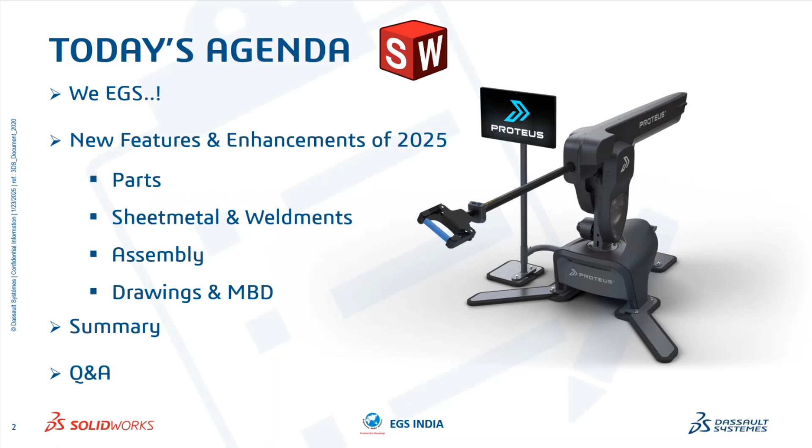We will be going over a short introduction about us, EGS, and then we will go over the new features and enhancements of SolidWorks 2025, followed by the enhancements in parts, sheet metal and weldment interfaces, then assembly and drawings, and finally we will summarize it all.

So let's start. EGS is a certified SolidWorks reseller. We have been providing design and FEA solutions for the past 3 decades, in the market since 1993.

We have implemented PDM and PLM software solutions for many of our customers. We have offices in Chennai, Coimbatore and Trichy, with Chennai as our headquarters, and we are one of the leading SolidWorks solution providers in Chennai.

We have 140 plus employees with 1,500 customers. We have affiliations with CII India, IMTMA, IPI, MMA, etc. We have consistent growth of rupees 42 crores every annum. These are our teams.

We have a separate team for reselling software solutions, and we have our own development team. We are partnering with Dassault Systemes for reselling of SolidWorks in the southern region of India.

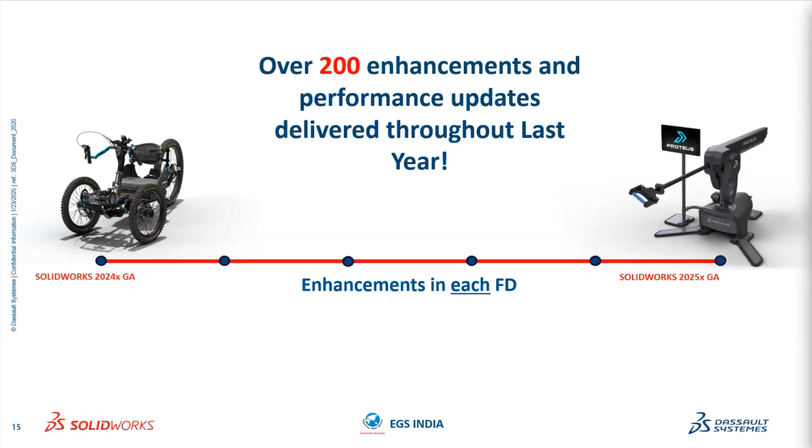This year there are a few enhancements and new features in SolidWorks 3D CAD. We will see about that. Over 200 enhancements and performance updates have been delivered throughout the last year. There are new features added to SolidWorks 2025. I will explain these in the upcoming session.

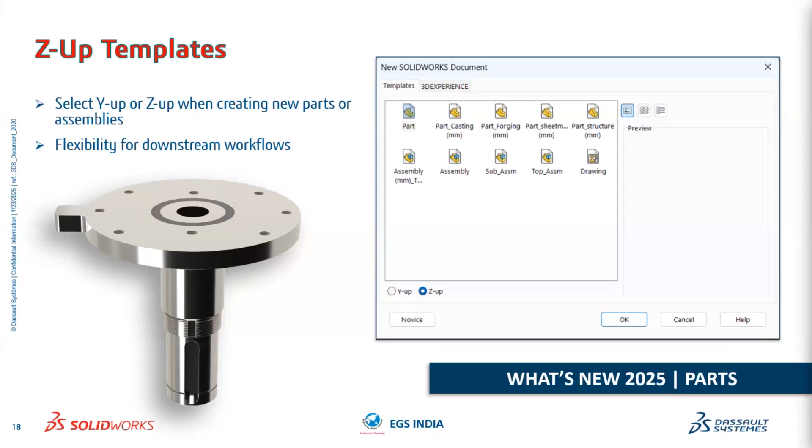Let's start with parts. The first feature we are going to see is a new orientation, which is Z-up orientation. We all know we have had the Y-up orientation in SolidWorks for so many years. In order to get Z-up orientation before, we had to change the orientation manually and set it as a template. Now that additional step is no longer required, as we can simply use Z-up orientation on our newly created parts, assemblies and drawings.

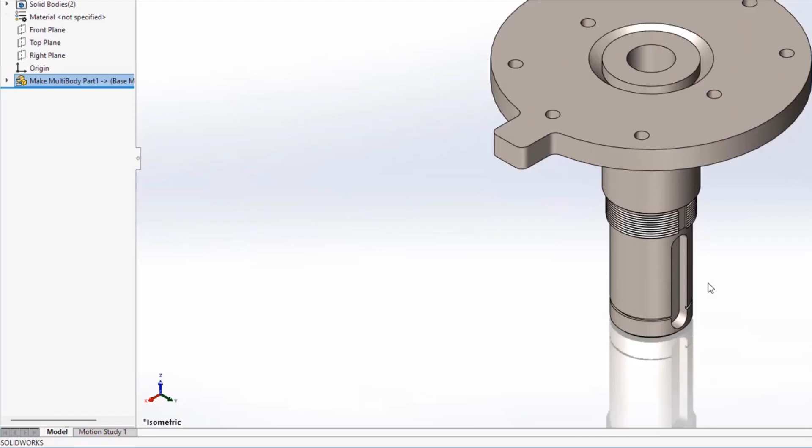Also on our existing parts and assemblies, we can simply switch the orientation for our use cases. This will be very much helpful in our downstream workflows. So this is our first enhancement.

The second enhancement came in the form of the Silhouette Defeature. Users who have used SolidWorks may know about the Defeature operation we have in SolidWorks. We have two options in that: one is to simplify the existing geometry, and the second one is to create a Silhouette Defeature. This Silhouette Defeature has had some improvements over the past year.

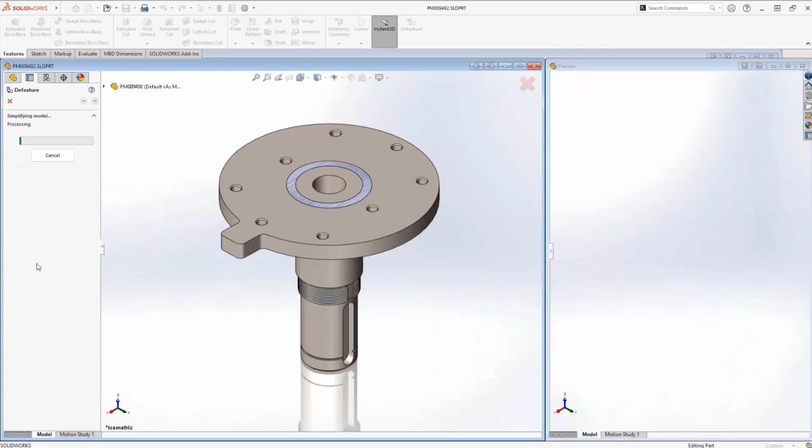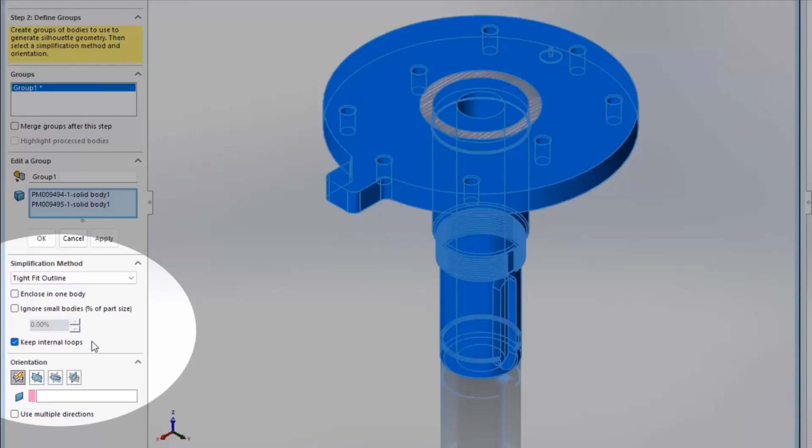We can choose our geometry and create a silhouette based on different bounding boxes, like bounding box, cylindrical bounding box, normal bounding box, etc. We can also create silhouettes based on a tight fit outline. This will be very useful in retaining performance with maximum efficiency while using SolidWorks. With a few simple steps, we can create silhouettes, or defeature any complex component into a simple component for our assembly use cases.

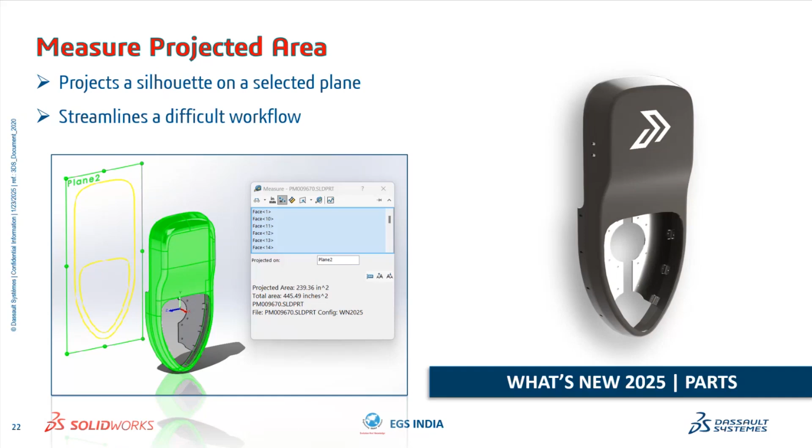The next enhancement is in the Evaluate tab. In the measure tool, we can now measure the silhouetted area. All we have to do is select the part's complex faces and project those faces onto a determined plane. We can use the existing planes to calculate the overall projected area of that particular part. This will be very useful when we are trying to get the developed area of that particular part. So as we see here, we can easily measure the projected area using the Evaluate tool.

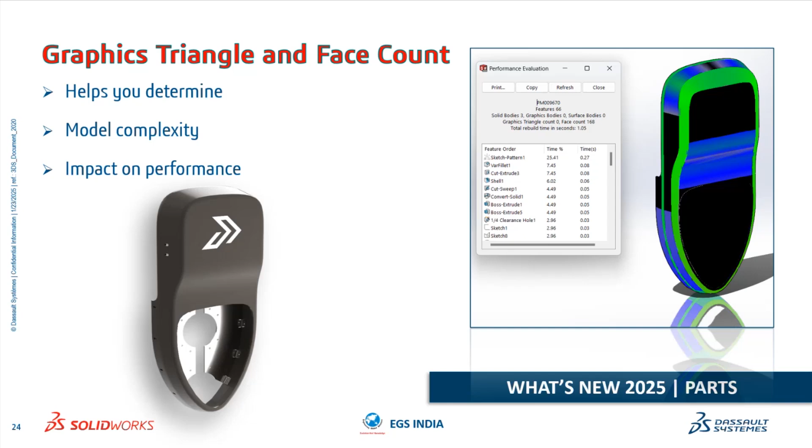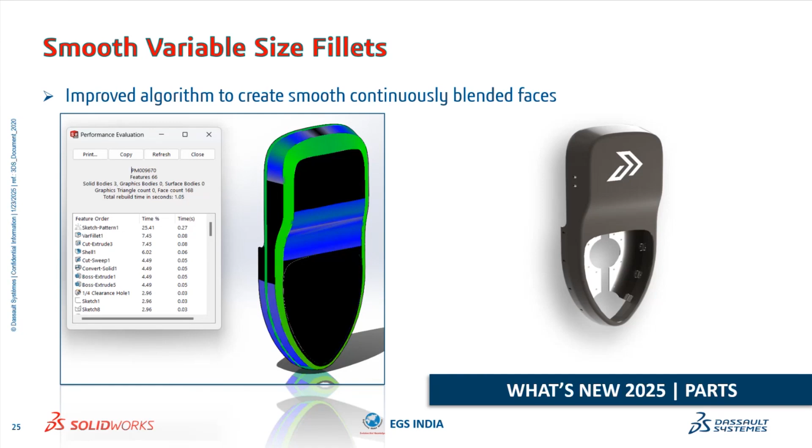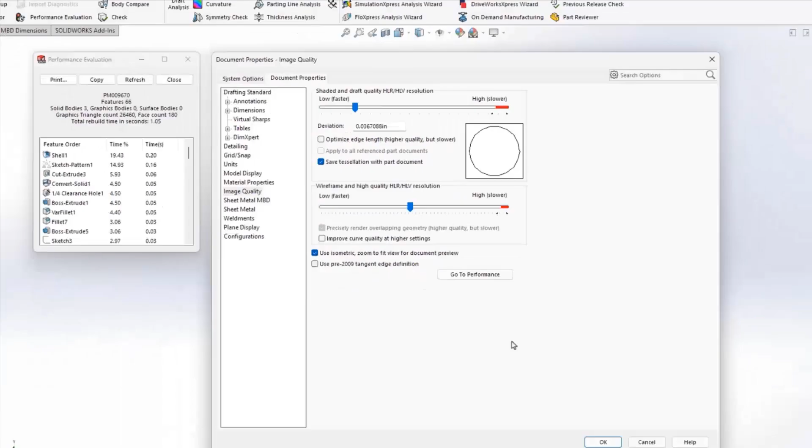The next enhancement comes in the form of graphical triangle and face count. We can determine the model complexity and its impact on assembly performance. We can also optimize performance by obtaining smooth and variable size fillets across our parts. As we see in the evaluate tab, we can determine the face count and graphical triangle count of the part, and reduce that to gain more efficiency in SolidWorks. As we do this, we can see live that the graphical count and triangle count have changed, which has a major impact on performance.

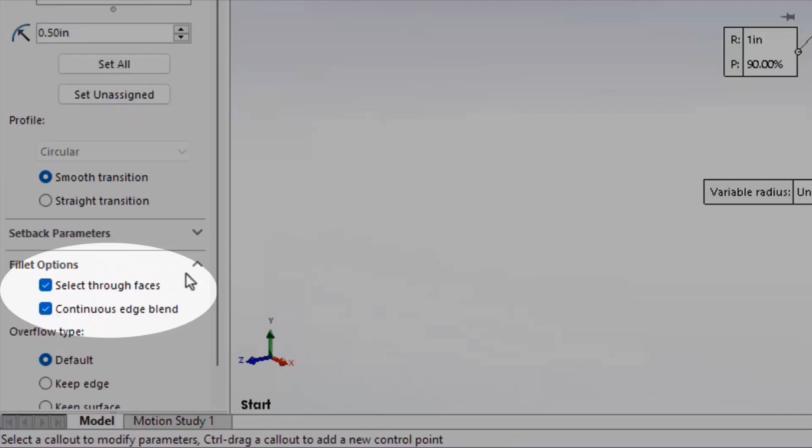We can further fine-tune it by creating smooth variable size fillets. We have an extra option to create smooth and variable size fillets, and we can check the smoothness of the particular part. As you see, the graphical triangle count has been drastically reduced here.

The next feature included is auto repair sketch relations and dimensions. Here we have a feature useful on assemblies where we can repair the mates. Similarly, if we have any dangling or wrong dimensions, we can simply repair that particular dimension.

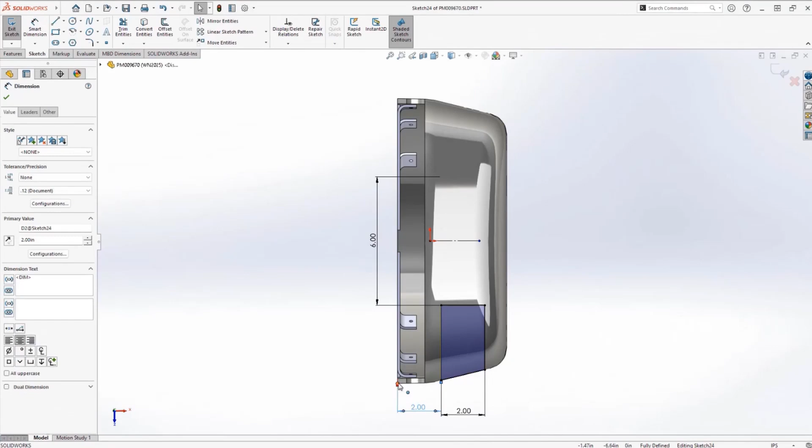All we have to do is simply select the sketch and select that entity. We can see what's wrong in that dialog box and track down the exact defected area. We can simply transfer that entity to a different place or repair it along the way. We have the option to repair the dimensions, or we can use the display and delete relation tab to replace all repaired, missing, or dangling dimensions.

Other features include converting your mesh body to standard BREP, and we can also import 3MF beam lattice as parasolid lattice, graphics mesh, and wireframe lattice. These can also be converted into mesh geometry.

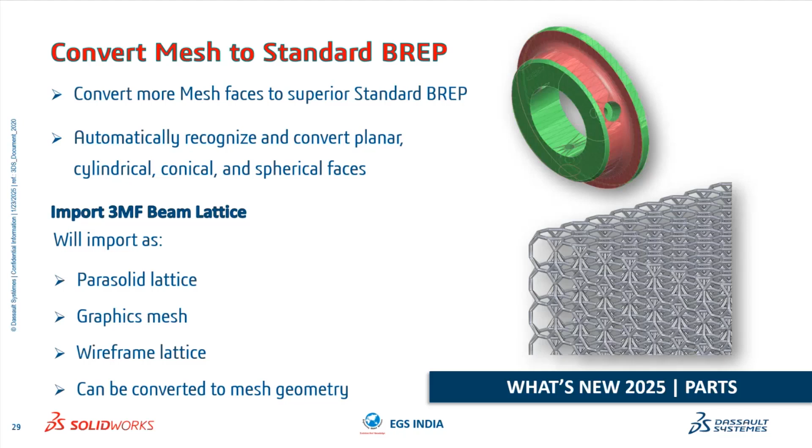We can now also pattern the reference geometry. Previously we could only pattern existing features or sketches, but now we can pattern the reference geometry, maximizing your workflow.

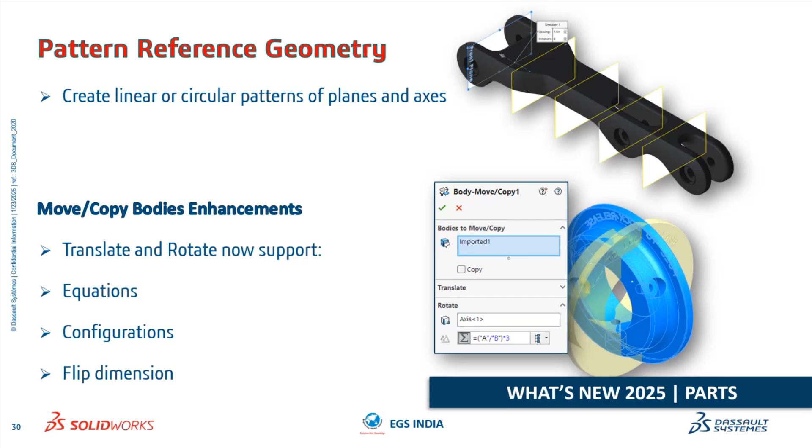There are enhancements to the move and copy body feature. We can translate and rotate as we all know, but now that feature supports equations and configurations. You can use your own equations and configurations with the move and copy body feature.

We can also use curve through XYZ points, creating multiple curves based on the XYZ locations we enter. We can simply reload it by clicking the reload button. You can also convert your existing entities into construction entities.

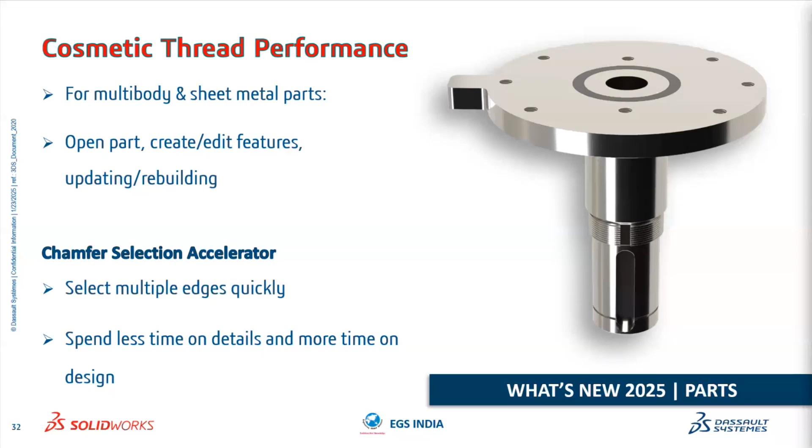The cosmetic thread performance of SolidWorks 2025 has also improved compared to SolidWorks 2024. As we know, we have the fillet selection accelerator, which we got in SolidWorks 2024. Now we have the chamfer selection accelerator, which helps you select multiple edges very quickly, so you spend less time detailing the component and more time on the actual design. These are a few important enhancements in the part area.

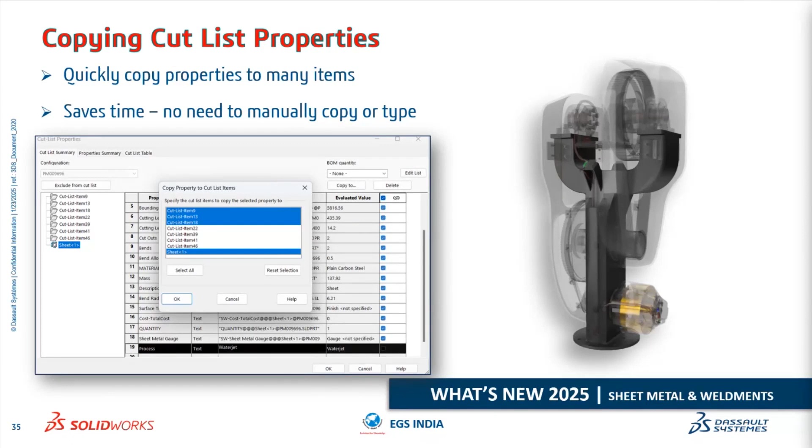Now let's go to the sheet metal and weldment interfaces. We can copy the existing cut list, which will majorly save your time. If you have existing properties in your cut list, you can easily copy them and use them on multiple cut list items.

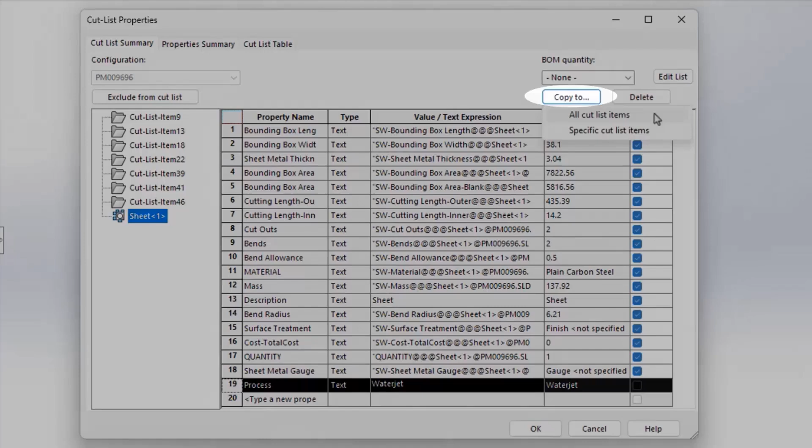As we see here, we can copy the existing properties, or create new properties and copy them within a few clicks. We can simply copy to all other cut list items, or select which cut list items to copy this particular property to. This will be very useful when creating sheet metal or weldment components, helping you save modeling time.

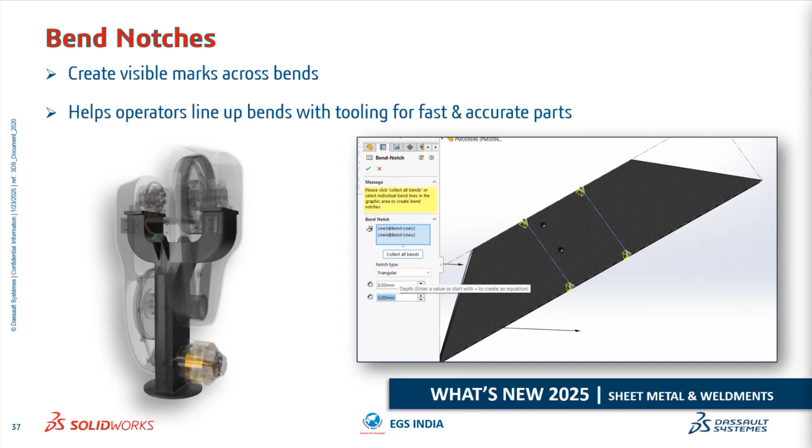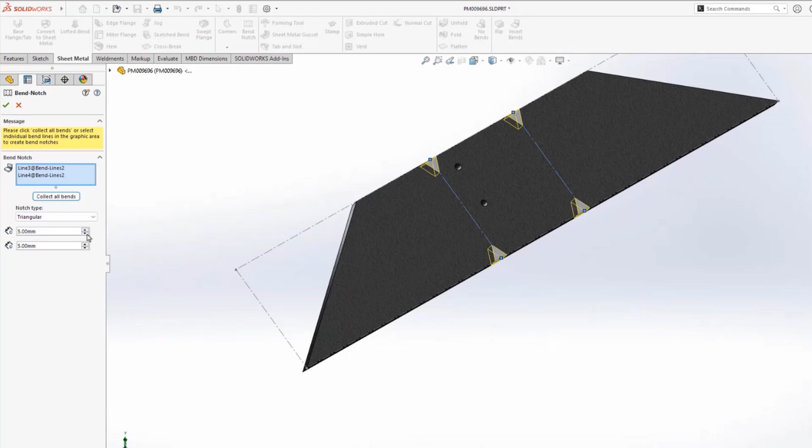We also have a new feature added to the SolidWorks 2025 sheet metal environment: bend notches. This provides better visual representation by creating visible marks across the bend, helping operators view bends easily. We can flatten the existing sheet metal part, and based on the bending lines, create bend notches with measurements. We can choose the type of bend notches and create them at different measurements for better visual representation.

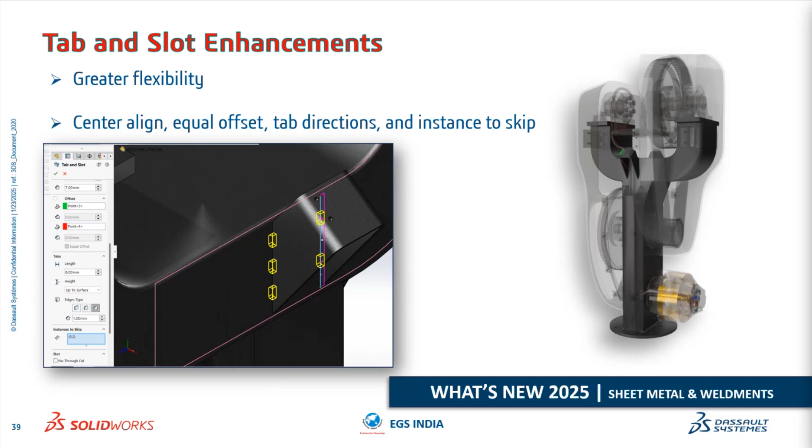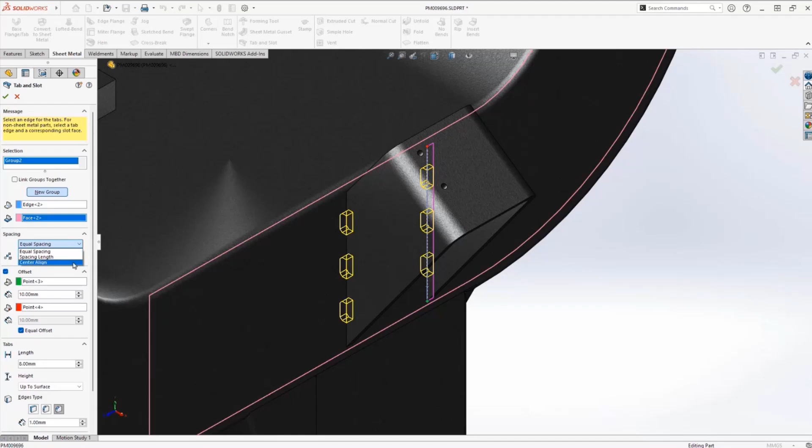In SolidWorks 2024, we got tab and slot as a new feature, and now it has come with a few enhancements. With greater flexibility, you can control each side of the tabs and slots, creating two different groups for the right hand side and left hand side for better separation. These two groups can be modified as per our needs. Here I'm simply skipping the instance on one side so we have a better differentiation between the right side and left side of the component. This is helpful for the visual properties of the part and provides better visual capabilities.

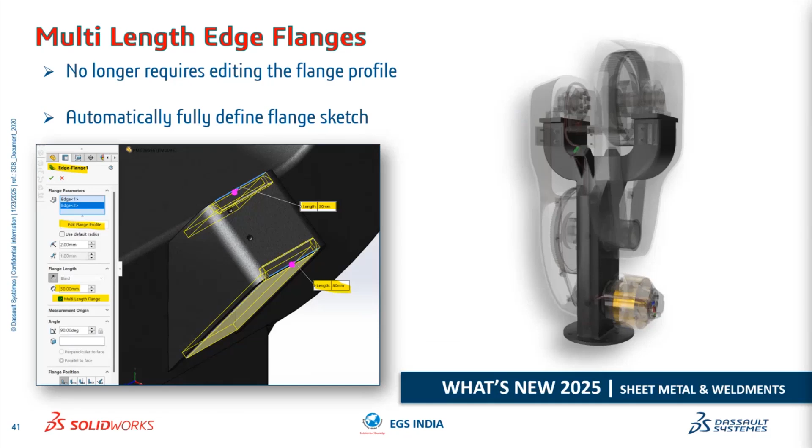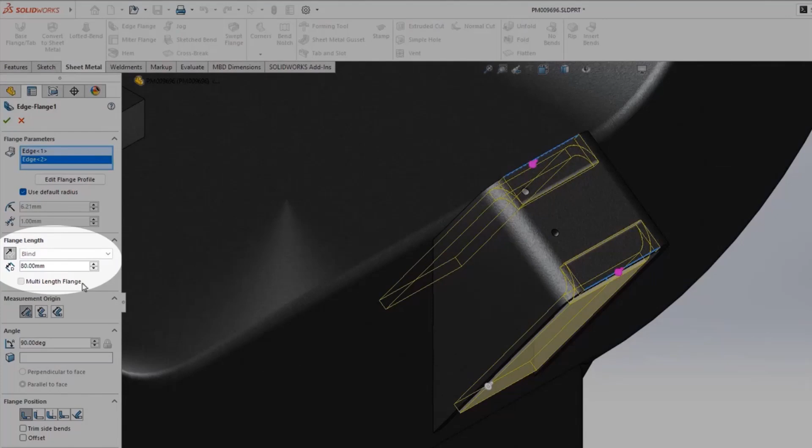Another addition to the sheet metal environment is that you can now create multi-length edge flanges. Before, in previous versions, we had to select each particular edge and edit it separately for every edge. That step has been avoided here, as we can now create multiple length edge flanges in one single feature. You can simply differentiate the two edges and determine the length of each separately, which helps speed up your workflow.

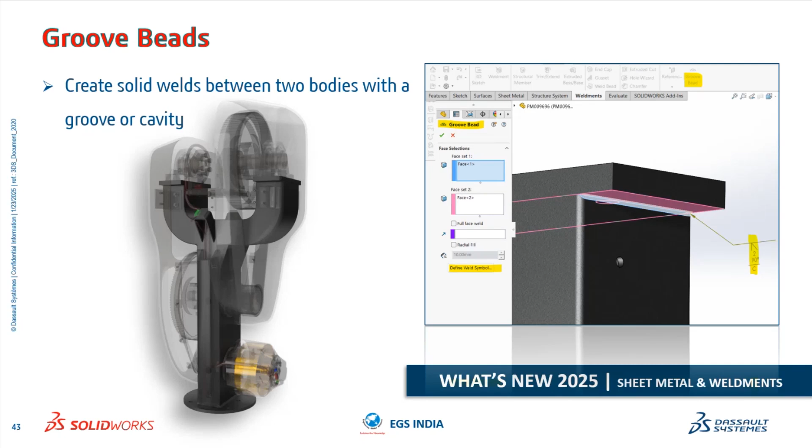Groove beads: as we know, we already have a feature called fillet bead that is useful for showcasing welded joints visually. In order to showcase the welded joint between components, the groove bead feature is now available in SolidWorks 2025. All we have to do is select the instances in that separate feature, selecting two different face sets, and simply use the groove bead feature, which also lets us include the weld symbol. The weld symbol now supports the ISO 21000 series, which I'll get to later.

We also have enhancements on weldment sides, such as allowing protrusion on complex profiles. There are other minor structure system improvements, such as being able to pattern or mirror a structure system. Connection elements can also behave as trim members in SolidWorks 2025.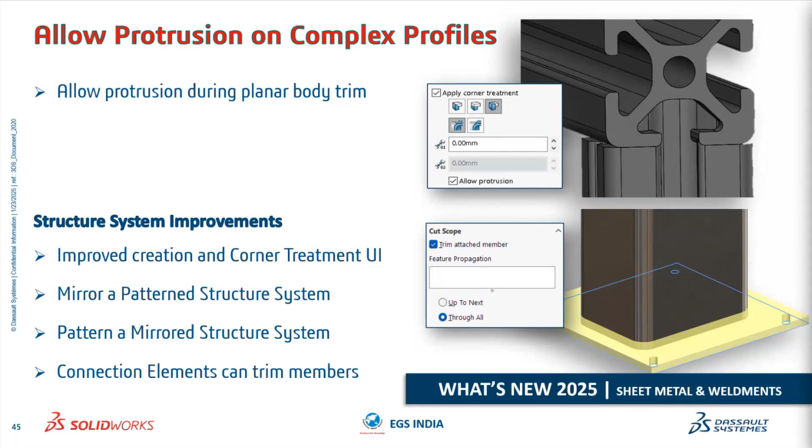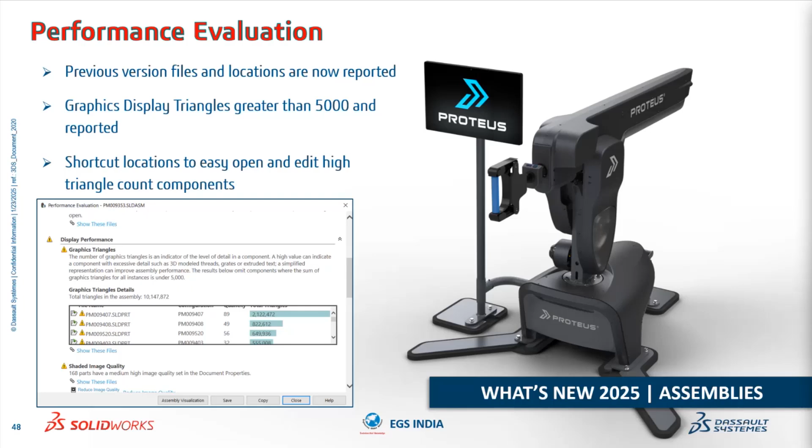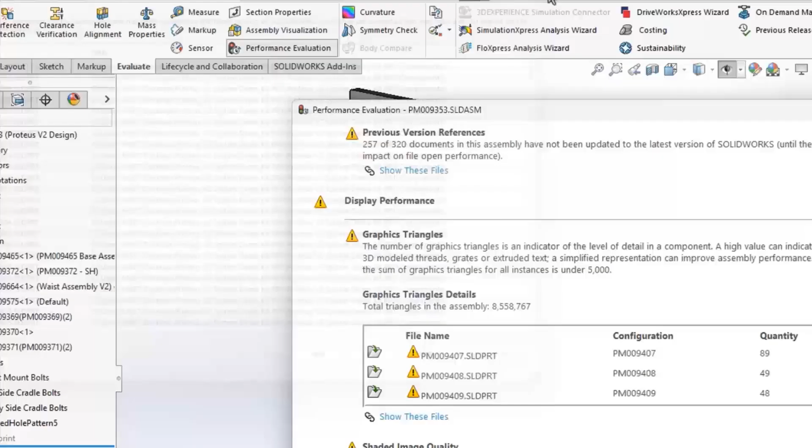Let's move to assemblies. There are a few enhancements here, the first being in performance evaluation. If you use a large assembly with more than 500 or 1000 plus components, this tool comes in handy to determine which component or part consumes more performance or takes more time to load. We can see the amount of graphics triangles, which component has the highest graphic triangle count, and which component took the maximum time to load inside the assembly. We can open that particular component here itself and further simplify it for better performance of the assembly, directly from the performance evaluation tab.

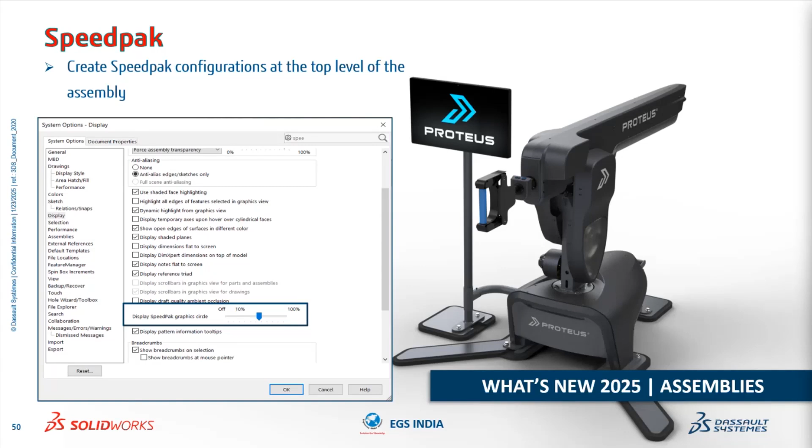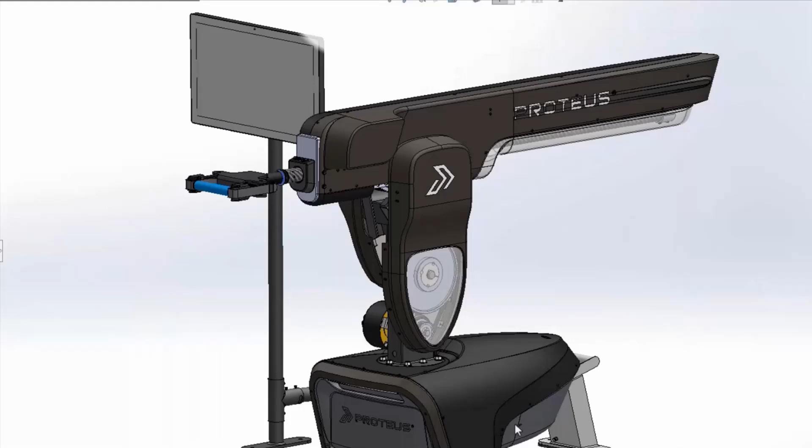The next enhancement is in the SpeedPak feature. SpeedPak is used to improve the performance of large assemblies by retaining essential components alone, while the remaining components only retain their visual properties in the SolidWorks assembly window. We can increase or decrease the intensity of the SpeedPak's graphics circle. Here we already have a separate SpeedPak configuration; as we edit the SpeedPak, we can see the important components we've chosen. This graphics circle can now be controlled from your system options, allowing us to reduce or increase its intensity in order to obtain better performance in large assemblies.

So the next enhancement has come to the LDR. Large design review is a very useful feature for people who use large assemblies. If you want to open a large assembly within an instant, you can use large design review to instantly open it in order to showcase that assembly to your higher officials or your customers. This will be very useful in that particular scenario.

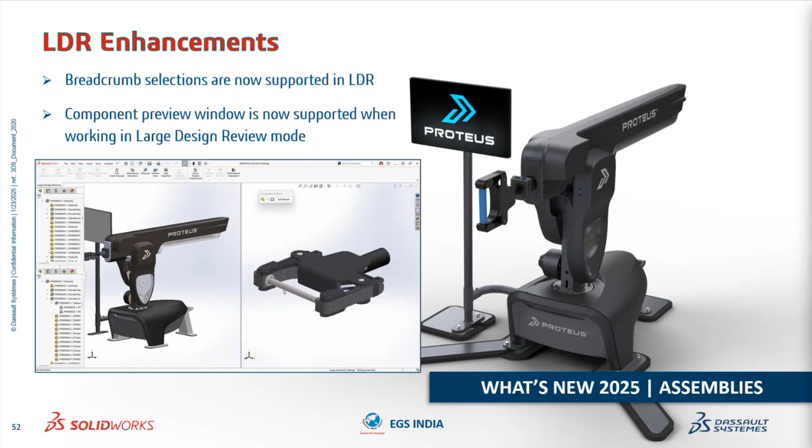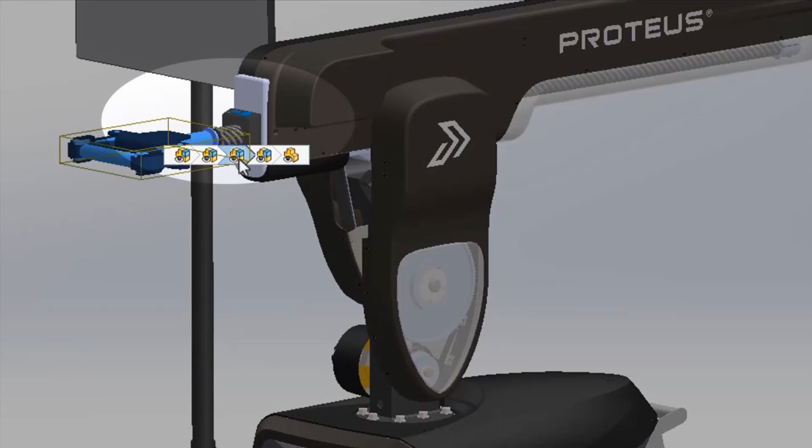So LDR has now come with enhancements. You can perform certain operations, such as checking the interference between components in LDR mode itself. You don't have to go back to resolved mode, you don't have to change the particular part into resolved mode. All you have to do is simply check the interference between components in large design review mode itself. So this will be very useful in your workflow in tight situations.

So the next new feature that has been added to assembly is the display state table. We all know how configurations are useful in the SolidWorks part and assembly environment. The display state table is a new addition to that. We can create different display states using this display state table.

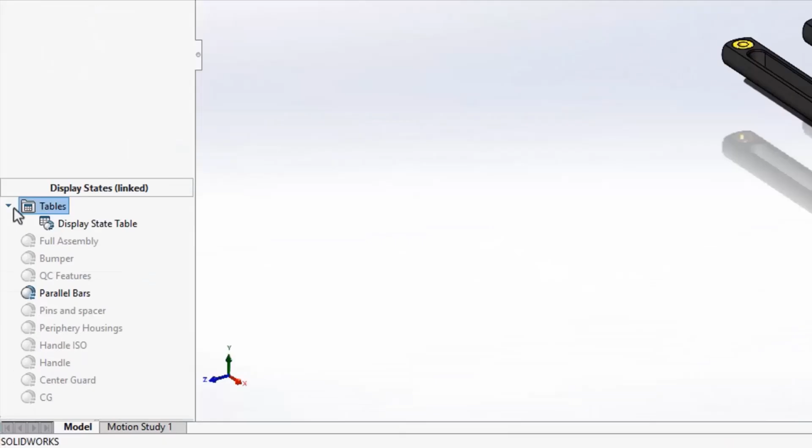If your assembly has different display configurations, so if you want to show a few particular parts or a sub-assembly for a particular drawing sheet, you can separate that based on your display state. As we see here, I've separated the entire assembly into different display states with the display state table. You can simply hide or show whatever component you want based on the display state, and you can create multiple display states all at once.

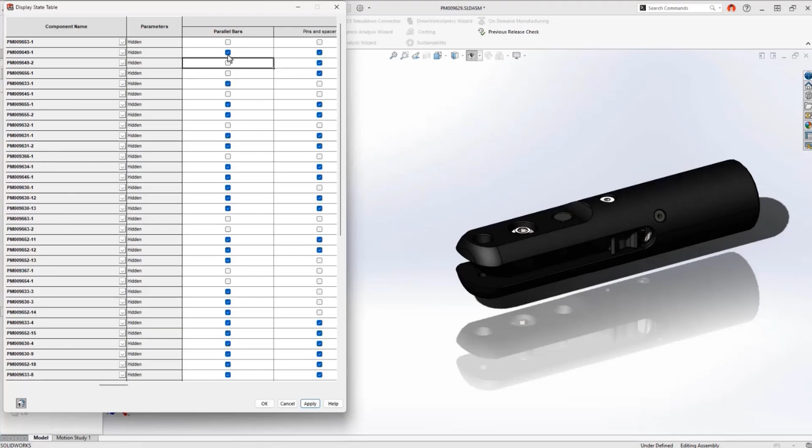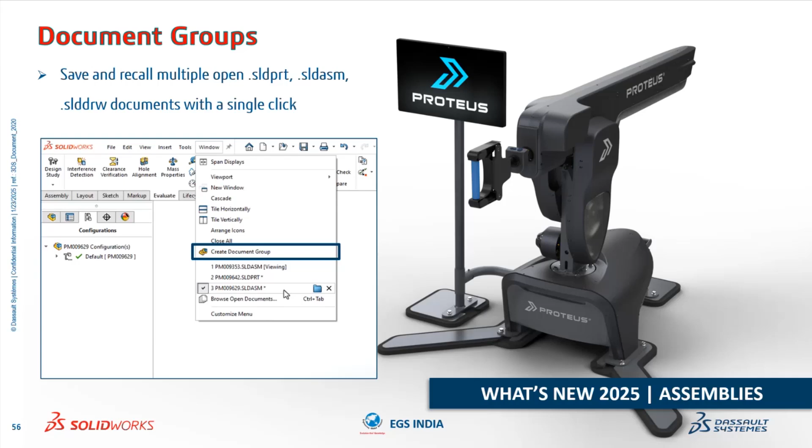So now we can group the documents while using SolidWorks. This is applicable for all the part, assembly and drawing environments. So if you are working on a particular drawing and you need to jump between the drawings, assembly or a part very frequently, we can use this document grouping to open all that assembly and part in a single click, and we can switch between them seamlessly. So this will be very useful when you work under urgency.

So you can simply create multiple groups of those components. As you see here, I have the assembly and two sub-assemblies open simultaneously. We can switch between those CAD documents.

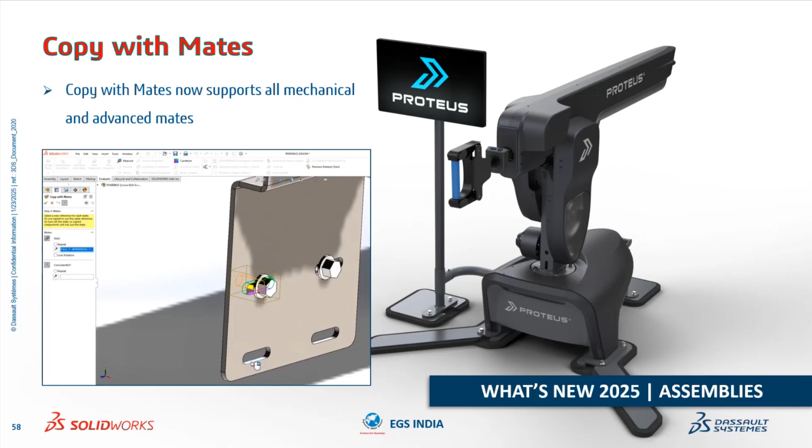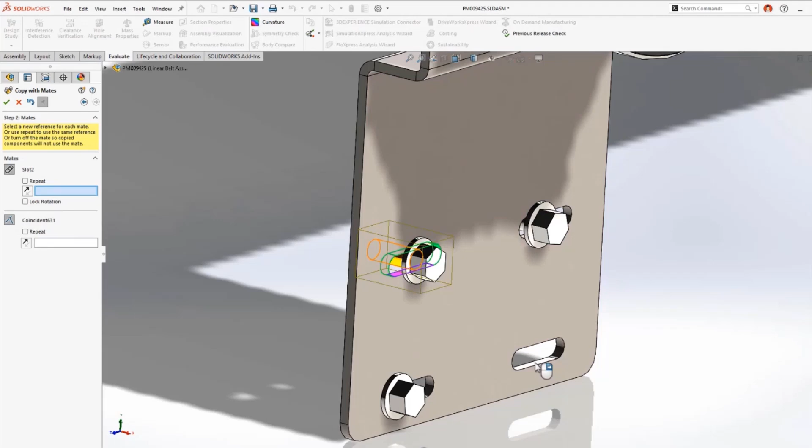So copy with mates is a well-known feature that has been used by a lot of users. Copy with mates has come with enhancements. Now it supports all the advanced mates in SolidWorks. The existing copy with mates in previous versions only supported the standard mates, such as coincident, perpendicular, mates like that. Now we can use copy with mates on advanced mates also. Like here, we can use copy with mates to create slot mates on that particular bolt. So this is a very useful feature included in SolidWorks 2025.

So the other enhancements are, we can include the 3DEXPERIENCE connected attributes in our assembly visualization tab. The assembly visualization tab, for those who are not aware, is a very useful tool to determine which component takes more time or more space to load, and which component has more mass, so we can simplify; we can see through that.

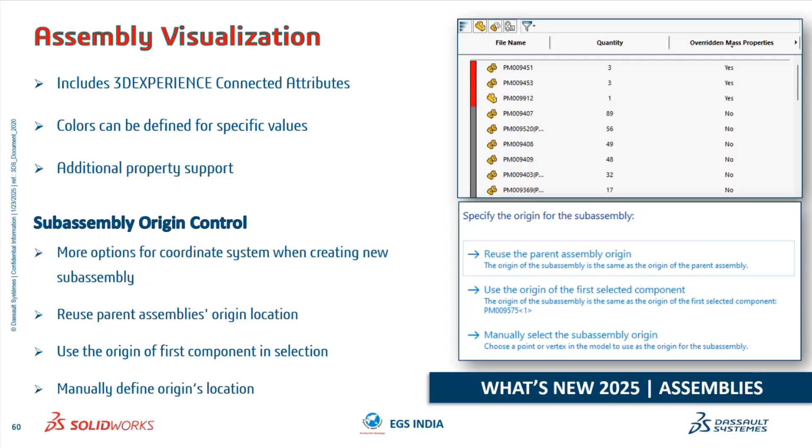We also have a subassembly origin control, where we can reuse the existing parent assembly origin, or use the origin of the initially selected component or initially imported assembly, or we can manually select the origin of the subassembly separately. The reorganize components property manager UI is completely revamped. As you can see, the selections have been made easy.

The assembly mass property performance has also been improved, so that the mass calculations won't happen every time for each and every part, as every part has its own mass calculations. Those mass calculations can be obtained from the assembly itself in order to reduce the time. You can also measure the angular rotations between coordinate systems if you have multiple coordinate systems, and you can seed the pattern display state. So you can use the display state as a pattern seed.

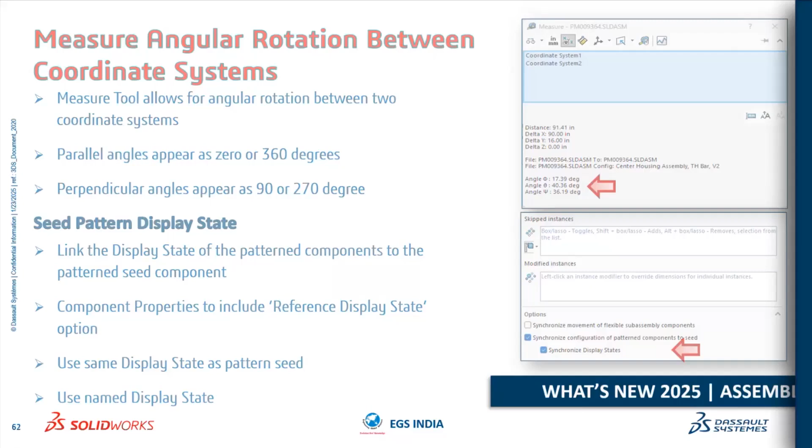Let's move to drawings.

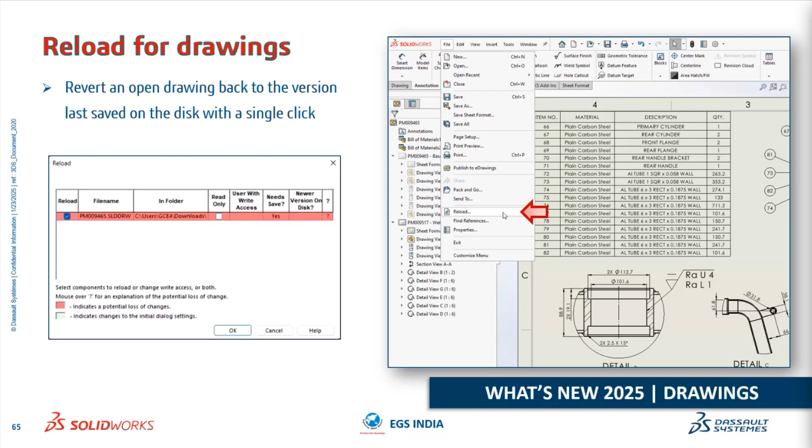So the new enhancement or the new feature that has been added to drawings is you can reload the previous version of the drawing if you haven't already saved your document. If you made multiple changes, or changes which are not required to your drawings, you can simply reload to the previous version of the drawings if the drawing is not saved before.

So as you see here, we have the option on your file tab. So you can simply reload to the existing saved version of that particular drawing. So this is a very useful feature in order to avoid unwanted changes or unintentional changes in your drawings.

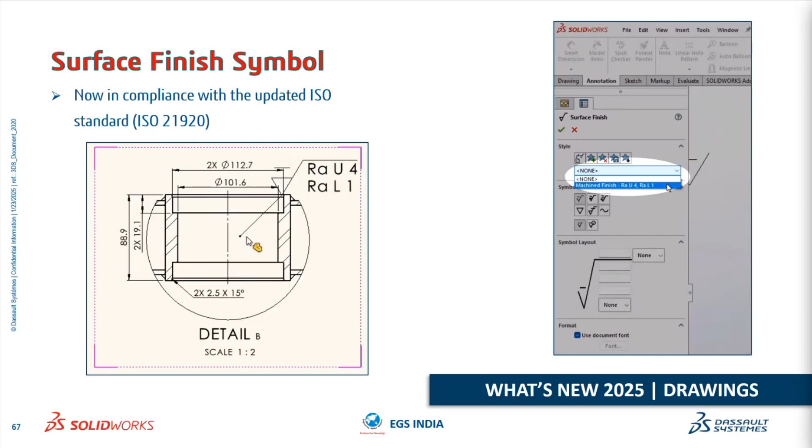So the surface finish symbol is now in compliance with ISO 21920 standards. So we can use that while using the surface finish symbol. As you see here, we have a drop down to choose between the standards. So we can simply choose and use it on our drawings.

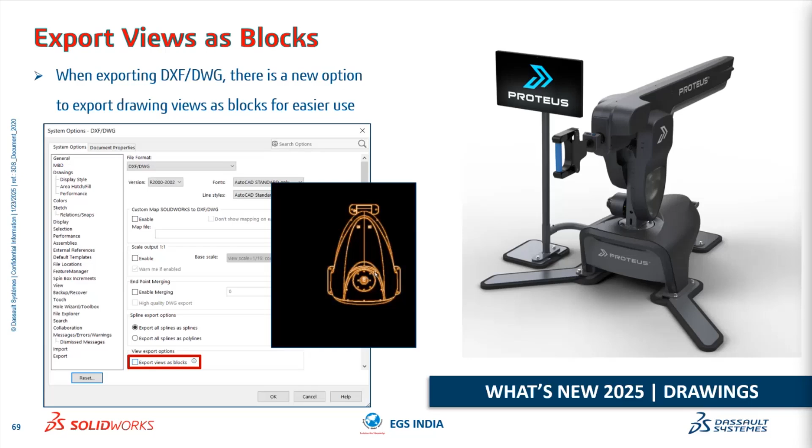So now the views can be exported as blocks for a better communication between 2D CAD and 3D CAD. So you can simply save your drawing to DWG or DXF format. While saving, you have the option to save each and every view as a block separately for a better interaction with the 2D CAD.

So before, if you wanted to do this particular operation, you had to go through multiple steps. So now that series of operations is simplified into one single step. So you can simply create multiple blocks of your existing drawing very easily.

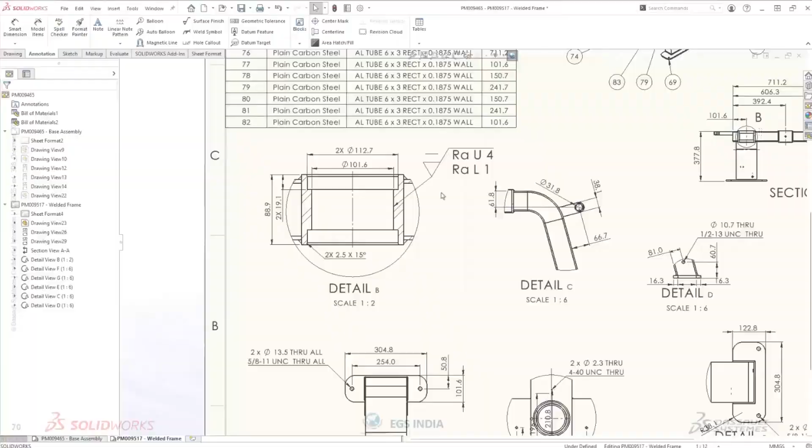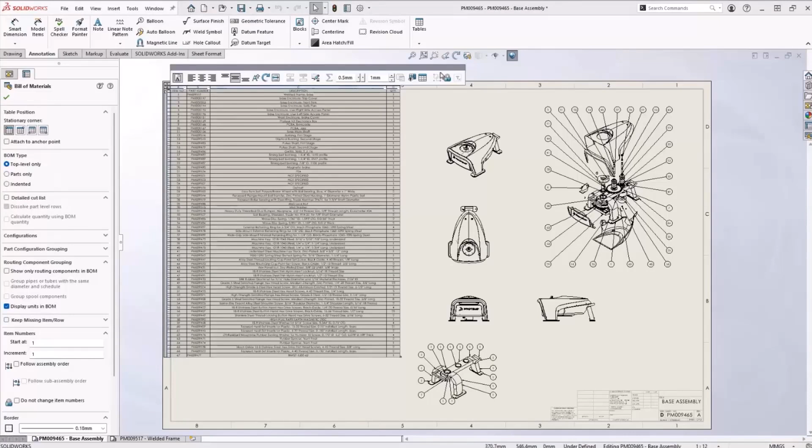So you can override your BOM quantity. As we all know, we can override the BOMs. So now we can create a detailed cut list on our assembly BOMs, and we can choose which of the attributes contributes the quantity of that particular cut list's components. As we see here, we have a detailed cut list present in the second page of the drawing.

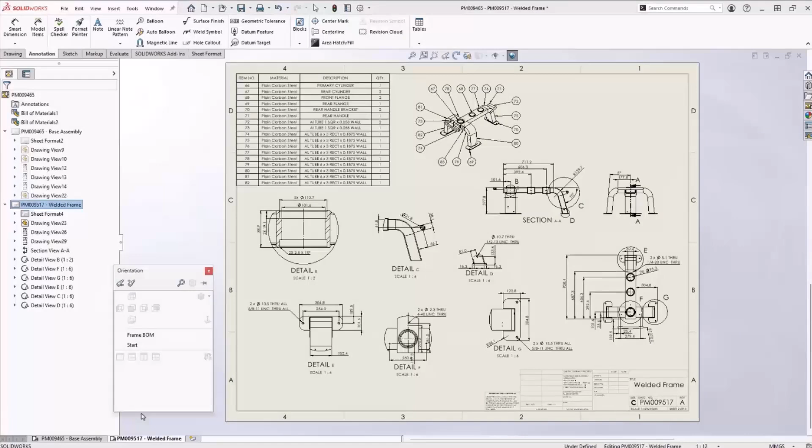So we can determine what should be the quantity. In here, the quantity should be the length of the particular weldment member. So in order to obtain that, we can simply use the calculate quantity using BOM quantity.

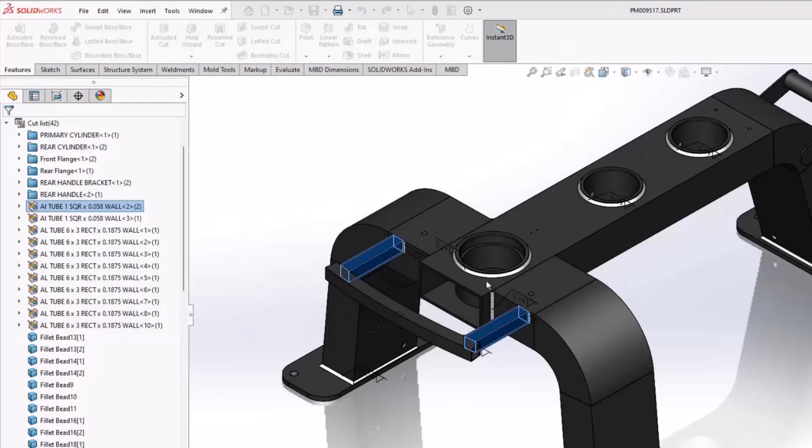So we can change that particular quantity attribute from the model itself. As you see here, you can simply edit the cut list and you can choose which attribute has to be the quantity for the bill of materials. So as we see, we use length as quantity here in this weldment member.

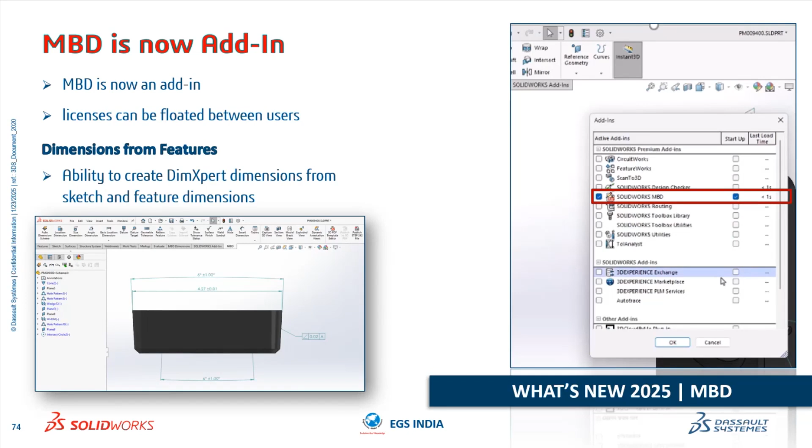So now MBD is a standard add-in across all the SolidWorks offerings. So you can use MBD. There are enhancements in MBD features as well. You can create DimXpert dimensions from the sketch and feature dimensions itself. We can add size and angle dimensions in a better manner. You can also export to STEP 242. That export option has new controls.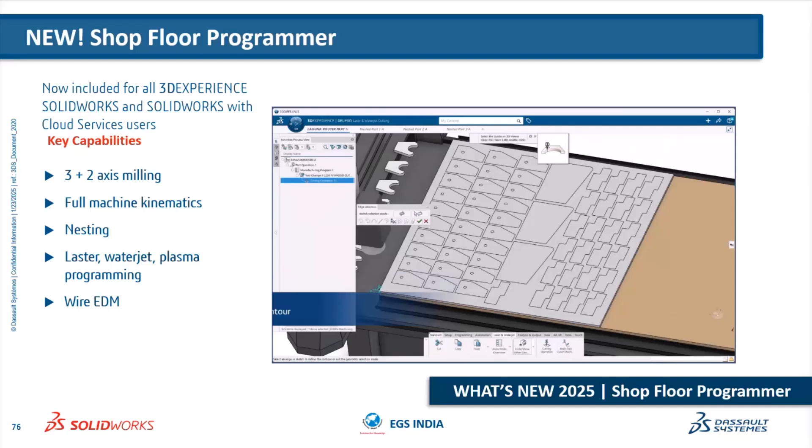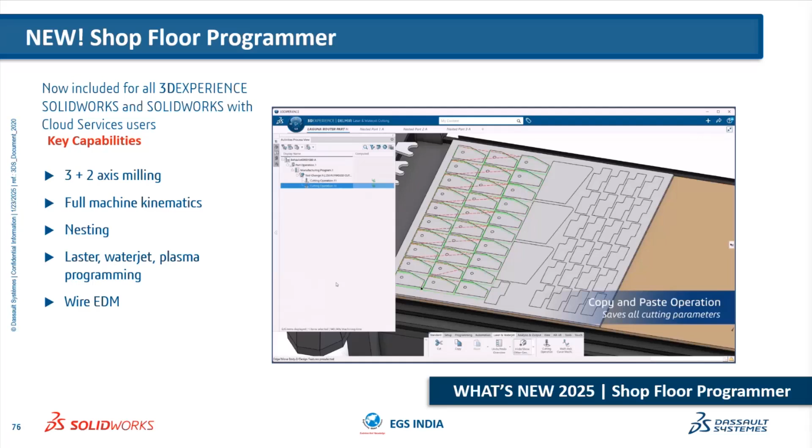So nesting has been a very requested feature among customers for a long period of time. Now you can perform your nesting operations in SolidWorks itself using the NC Shop Floor Programmer role. So this role is now a standard offering for all the SolidWorks offerings. So these are all the enhancements that have been included in the drawing.

So let's recap. Let's summarize everything. As we know, we have a new Z orientation for our part and assembly documents, where you can use them for better downstream workflows, and we can create silhouettes of complex components in large assemblies in order to obtain maximum performance.

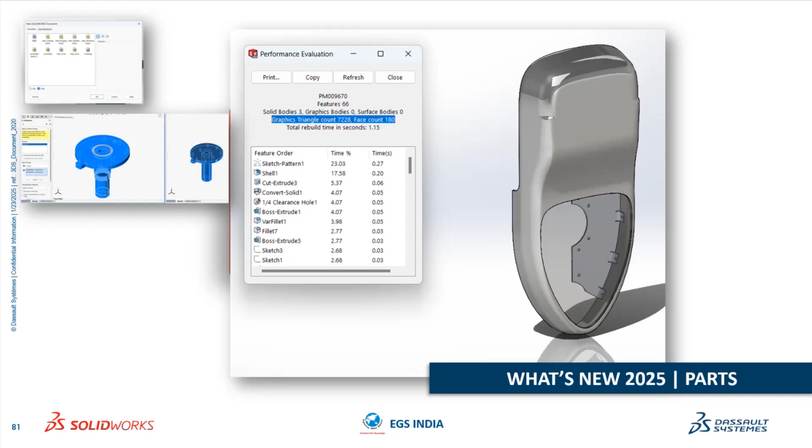And we can view or visualize the graphical triangle counts for complex parts, and we can fine tune that graphical triangle count for better performance. Smooth variable size fillets have now been enhanced, and we can measure the projected area of that particular component using the measure feature in SolidWorks.

And you can also auto repair your existing dangling dimensions which have missing references in SolidWorks. You can simply repair or replace the existing entities for that particular dimension, in order to better your workflow.

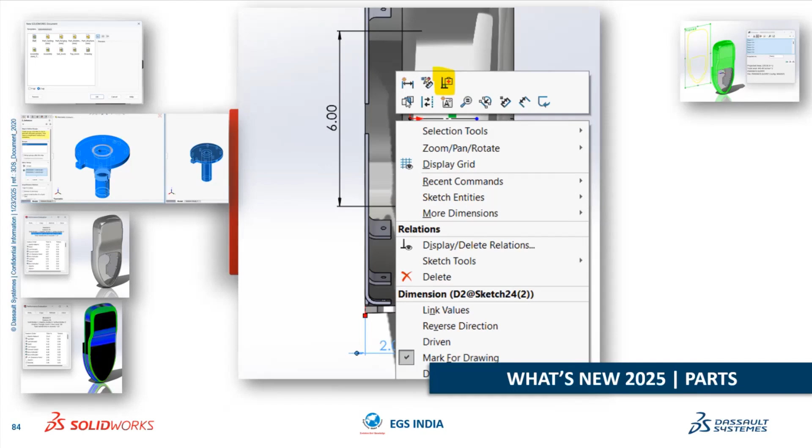So another additional enhancement that has been added is you can now delete all features or sketches below the rollback bar very easily. So these are all the enhancements that have happened in the part environment.

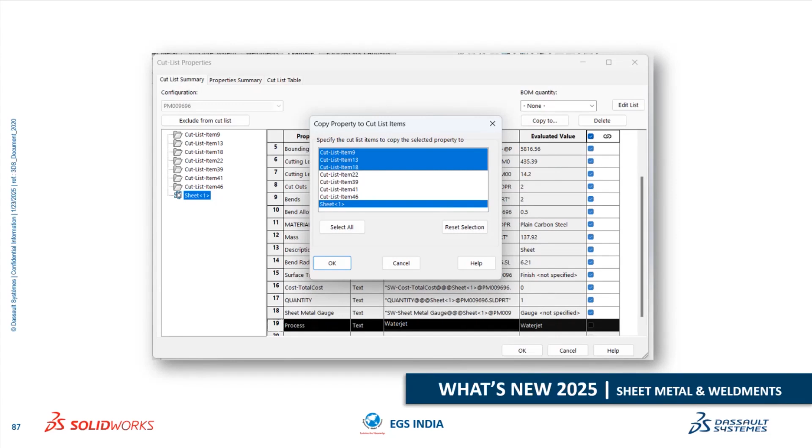So in the sheet metal and weldment environment, now the cut list properties can be copied along multiple cut list items. You can select between all the cut list items or particular cut list items as you wish. And then we have bend notch as a new feature in order to create bend notches for better visual representation.

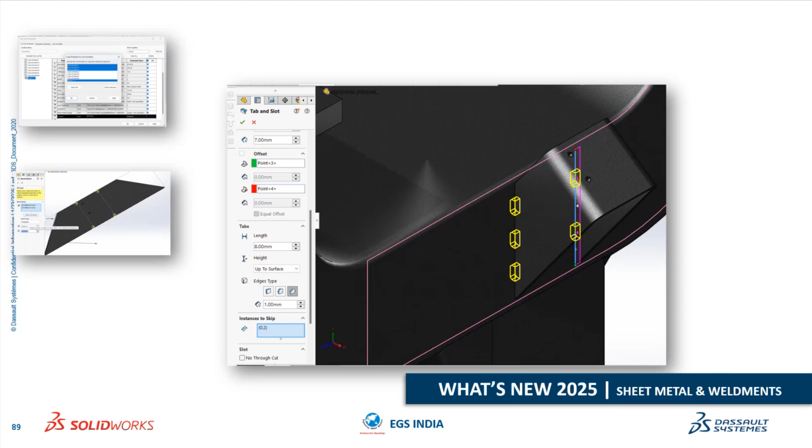And we are able to differentiate two sides of tabs and slots by creating new groups. We are able to skip instances on tabs and slots, which will help us to create better differentiation between two different sides. We are also able to create multi-length edge flanges, avoiding all the multiple additional steps we are using in our existing versions of SolidWorks.

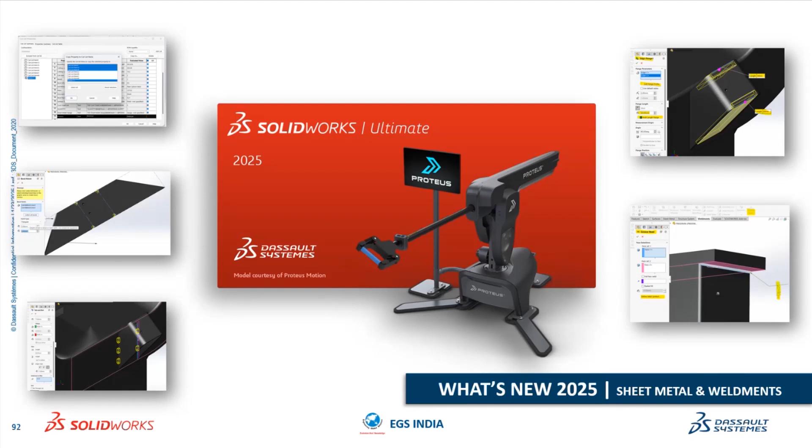So the groove bead has now been added to provide you a better representation of welds between the components. So these are all the enhancements that have been added to sheet metal and weldments.

Now in assemblies, we are able to determine which component is excessively taking the hit in performance. By seeing here, we are able to view the graphics triangles. We are able to open and simplify the particular component as we need. We can also reduce or increase the intensity of the graphics circle in SpeedPak. This is very useful when you work in a large assembly environment.

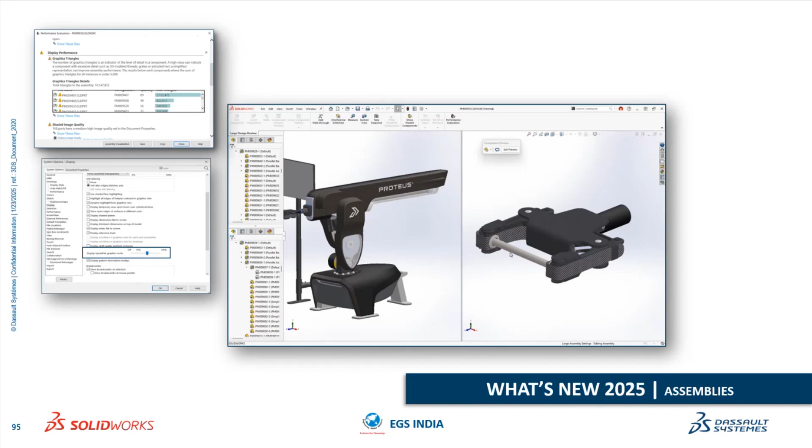So LDR now has many enhancements, such as you are able to perform your interference calculations in LDR mode itself. You are able to perform collision detection in LDR mode itself.

So now, similar to the configuration table, the display state table has been added to SolidWorks 2025, where you can create multiple display states based on your requirements. If you are creating multiple levels of drawing, this display state table will be very helpful so that you can show the variations between different states of your assembly or your particular component.

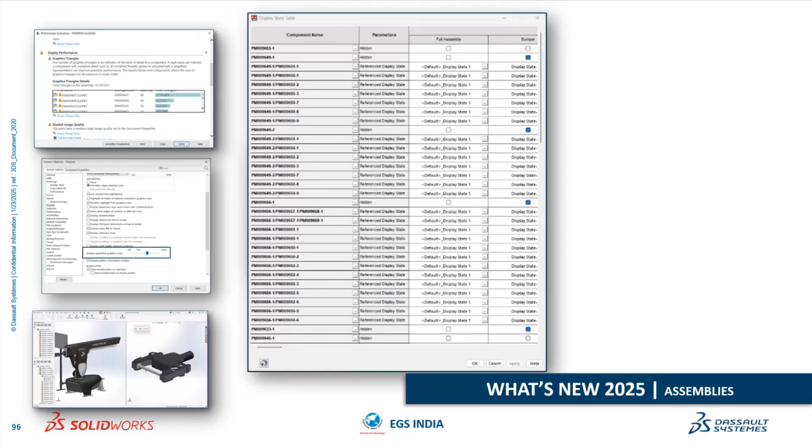You can also create document groups to work seamlessly between part, assembly and drawing. You are able to open a group of components in one single click. You can use that option for maximizing your workflow.

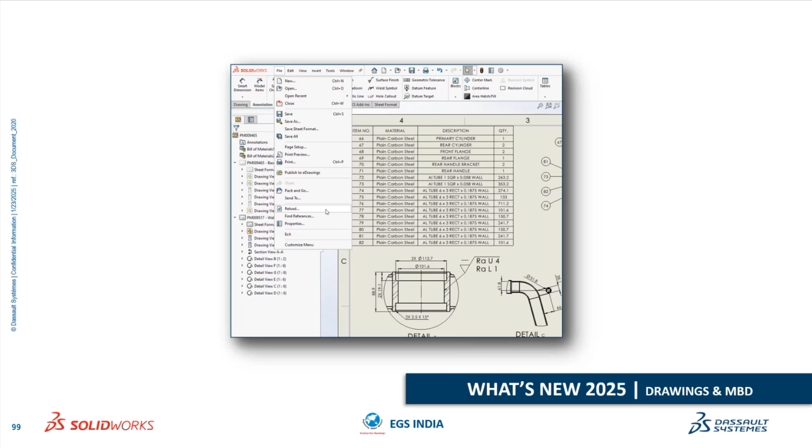So in drawings, we are able to reload the existing saved version of the drawing. If the drawing is not saved and you have unintentionally made some changes which are not required at that particular moment, you can reload the previously saved drawing very easily.

We are able to use the surface finish symbol, as the surface finish symbol is now in compliance with the ISO 21920 series of standards. We can also save existing drawings as DWG and DXF, as we all know, and we can export each and every view as blocks for better communication or interaction with our existing 2D CAD software.

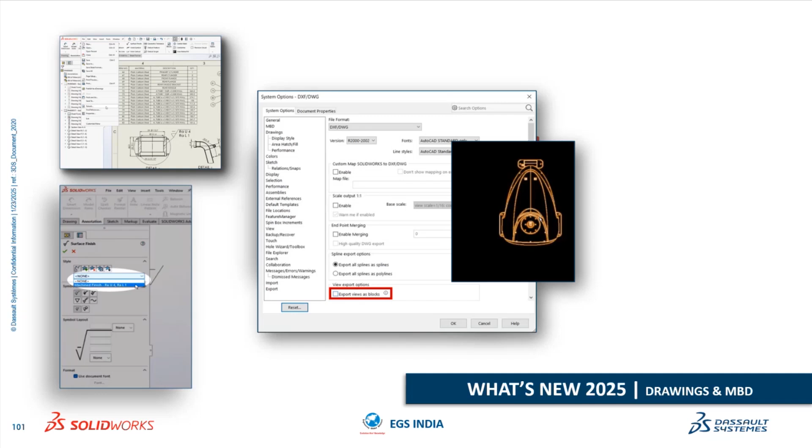So MBD is now a standard add-in on all the offerings of SolidWorks. You can also change the quantities of BOM while using the cut list properties. You can simply choose which attribute or property should be shown as quantity in that particular weldment cut list table. You can choose that. So this will give you more granular control over your designs.